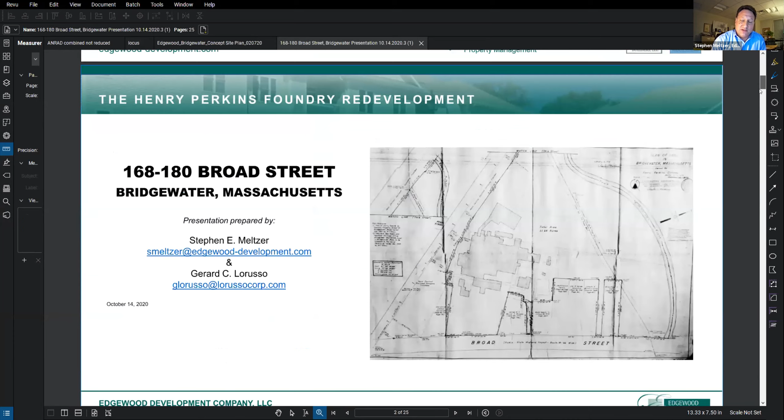Our project basically consists of removal of the buildings that are there now, grading the property, and constructing a building in the front which will be a mixed-use building with retail on the first floor and residential apartments on the second floor. That's a small building in the front, and then with any luck, the project will include a larger building with residential apartments in the back, green space, and recreational amenities for members of the community to use.

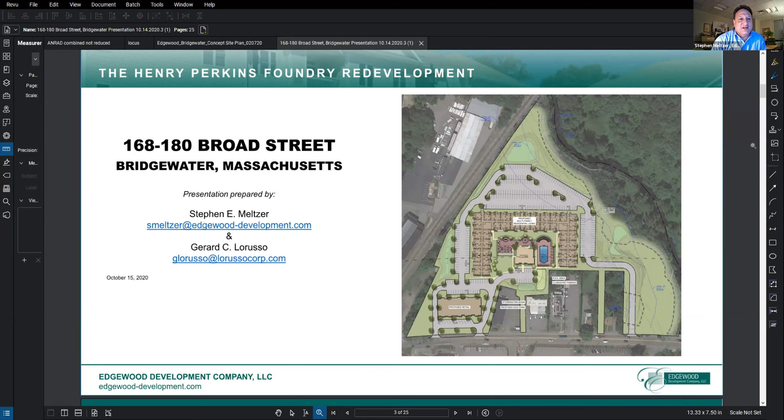Oh, great. Thank you for bringing that up, Seaver. So you can see on the plan, as much as possible, we're avoiding the jurisdictional areas.

Seaver Anderson is with us tonight from PAR Corporation. He is our environmental and wetlands engineer who will be providing the information on the ANRAD. But we also have with us tonight Peter DeShaves, who we've engaged as an environmental engineer. He's done a significant amount of soils testing on the site, so in case you have any questions or concerns with regard to the soils. And Christine LeBlanc is also here, who is the licensed site professional who has been working with the Perkins Foundry for a couple of decades on the environmental challenges out on that site. I'm happy to answer any questions about the project.

Did we lose him? I think he froze. Yeah, I think we lost him. Seaver, if you'd like to pick up for him, and we'll see if Mr. Meltzer makes it back in.

This is, certainly, looks like he's back. As I said, there are some soils issues that we're working with DEP on, and Peter Shaves can give you information on that. But I'm going to hand it off to Seaver Anderson, who's going to talk about the wetlands issues and give an overview of that and get us started. Unless anybody has any questions now.

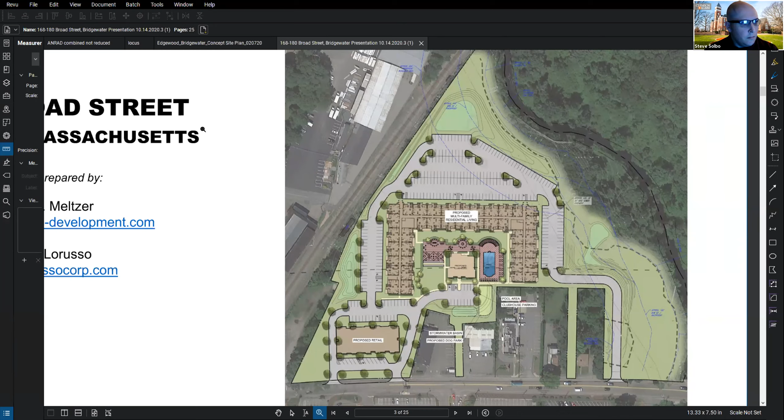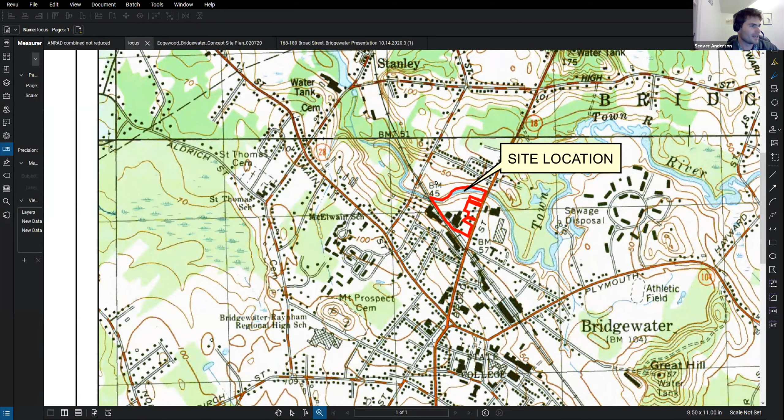Thank you, Stephen. Thank you, Steve, and thanks to the commission for hearing us tonight. As mentioned, the site is located at 168-180 Broad Street in Bridgewater. Here's a locus map showing its location. There's Broad Street, the MBTA commuter rail goes along the southwestern edge of the property. Broad Street follows or delineates the eastern edge of the property, and then the town river defines the northern boundary.

I'm just going to bring up the ANRAD plan. Site wetlands consist of the town river to the north. The southern bank of the river was delineated by PAR, and this is defined by the R series flags that begin on the northwestern edge of the property and delineate the river for the length of it to Broad Street.

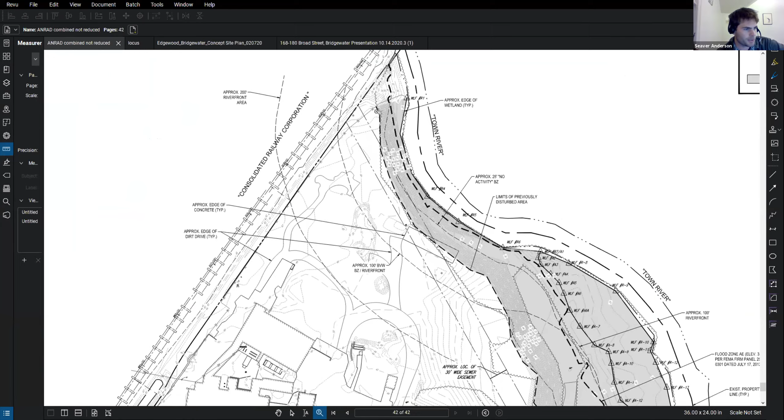There is also a bordering vegetated wetland located along the town river. It's a floodplain wetland, and its edge is well defined by a dirt road that runs along here, and it's a pretty defined break in slope that delineates that wetland edge. I should also mention that the banks of the town river are very steep. You can tell by these contour lines here, it's a very steep slope that goes pretty much right from upland down to the banks of the river. So there's no real gradual wetland edges on the property.

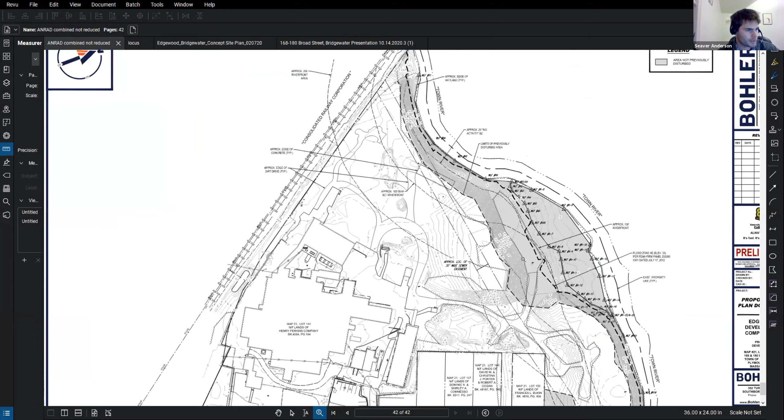There's a 25-foot no activity zone, as you all know, and then a 200-foot riverfront area and a 100-foot buffer zone off of these features. Also delineated on the site is the extent of previously developed riverfront area, which extends to the break in this steep slope that's present along pretty much the entire site, except for one area where a dirt road comes through here.

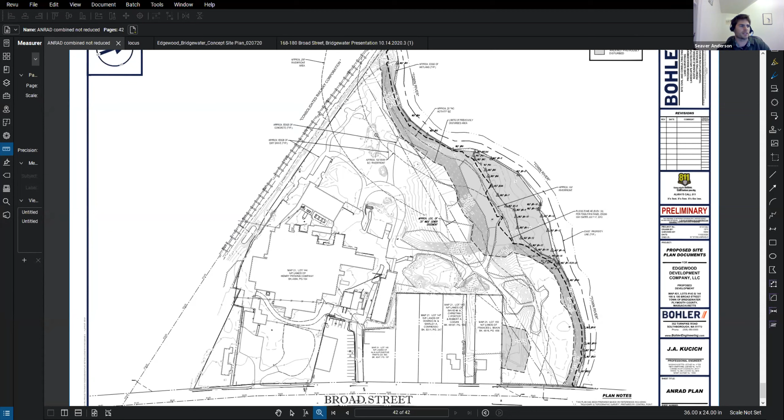This portion of the riverfront area consists of previously developed land, as defined in the WPA, consisting of abandoned dumping grounds. It exhibits a lack of topsoil, and this is evidenced throughout the site, with old foundry materials, asphalt, slag, and concrete debris. You don't have to dig very far for it to be noticeable.

So in this resource, we request approval of these delineated lines and the mapping of the previously developed riverfront area, as it will be critical to the design of the project going forward. Thank you, that was all for tonight.

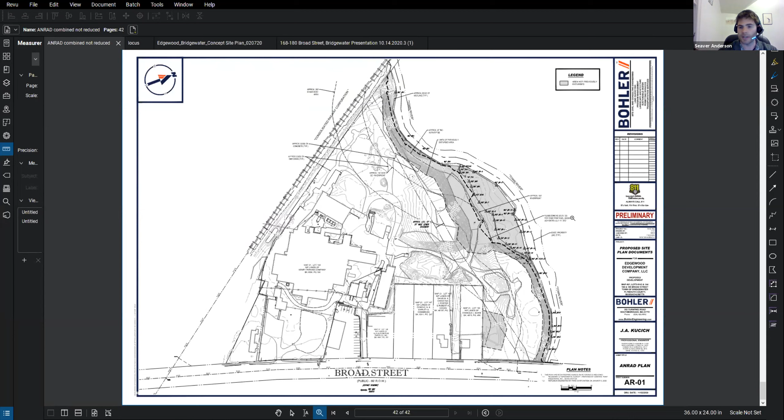If you need any questions on the soils further, Peter has done borings and test pits and can go into more detail on the site soils in this area. Thank you, yes, I would like some detail on the soil testing you did. What type of soils did you find?

Thank you for having us attend your meeting tonight. As Seaver indicated, along the steep slope from the top of the bank down to the river, the materials there generally consisted of foundry sand, a very coarse foundry sand previously used in foundry molds. Some had smaller pieces of concrete, but for the most part it was foundry sand, also known as green sand, although it was not colored green.

And it has just been stockpiled there historically after it served its purpose in the foundry molds.

Can you go into more detail with the soil testing, what type of soils you found, like an RCS 1, 2, any COM, any type of testing that way?

We tested several samples for a range of compounds, including extractable petroleum hydrocarbon fractions and target analytes, volatile petroleum hydrocarbon fractions and target analytes, PCBs, metals, and volatile organic compounds. With the exception of metals, we did not detect any of the other compounds in the sand at concentrations above the laboratory limits or above RCS1 standards.

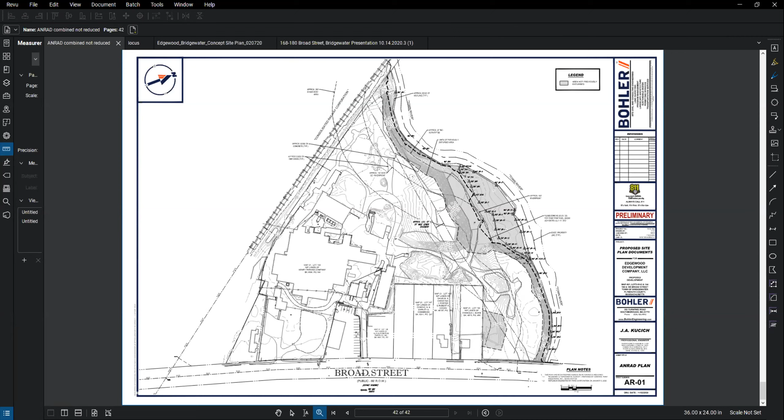Marilyn McDonald, aye. Harry Bailey, aye. Eileen Prisco, aye. Thank you guys very much for your presentation. Have a good evening. Thank you, everyone. Thank you, have a good night. See you next year.

That's the first one so far. Yeah. All right, moving right along.

Jasmine, if you can read in, please, the notice of intent for High Street Dam, Milone and MacBroom. Yeah, you can hear me okay? Yep, can hear you. In accordance with the Massachusetts General Laws, Chapter 131, Section 40, and the Town of Bridgewater Local Wetland Bylaw, the Bridgewater Conservation Commission will hold a public hearing held as a virtual meeting over Zoom.

On December 10th, 2020. A link and instructions to participate in the meeting will follow to be posted to the town's calendar on the town's website at www.bridgewaterma.org. A recording of the meeting will also be posted to the town's webpage within 48 hours after the meeting ends. The hearing is on a notice of intent filed by Bridgewater MA. The applicant proposes to remove the High Street Dam, replace the High Street Bridge, and restore the town river channel. The property is owned by the town of Bridgewater and MEM Realty Trust and is located at High Street in Bridgewater, Mass. Map 10, parcel 40 and 41.

Please contact the Bridgewater Conservation Office at 508-697-0950 for the hearing date and time. All interested persons are encouraged to attend. Thank you, Jasmine. High Street Dam project, you are now open.

Thank you. Oh, Michael, sorry, wanted to say something as well. Nope. Thank you for entertaining the request, and I'll turn it over to Chris Houle from Massachusetts DER to sort of guide the presentation. Thank you very much, Chair, as well as the rest of the commission members and Mr. Solbo.

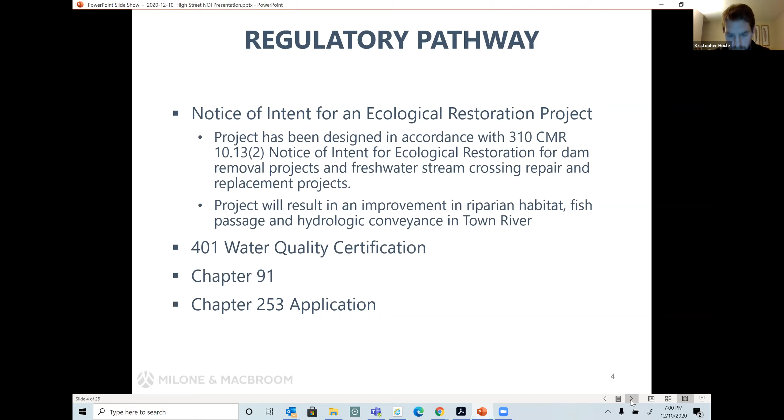Just to touch quickly on project timeline. Planning for this project began in about 2015. In 2016, it was accepted by the Commonwealth as a priority project.

At that time, we also held the first of three public meetings. Shortly thereafter, in 2017, Milone and MacBroom completed a feasibility study. We then shared the results of that at another public meeting, and tried to address public concerns as part of the preliminary design process and Section 106 historical consultation process.

On the historical aspects, the NOAA Restoration Center is the lead federal agency for this project, and they're leading all Section 106 related or historical related questions. So if anything comes up on that, we'll have some folks on the call to take those questions.

2020 is when we really started permitting. We hope to complete final design and permitting next calendar year to set us up for bidding and construction during the summer period of 2022. That's based on various fisheries time of year restrictions and trying to minimize disruption of traffic.

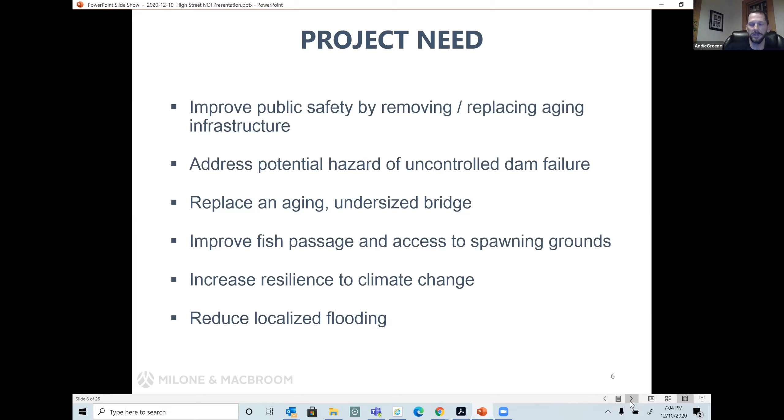So project goals and objectives: by replacing the bridge and improving the intersection, we provide improved multimodal transportation, replacement of utilities within the corridor, and will stabilize infrastructure and the structure itself of the Lincoln Athletic Building.

We are going to manage the impounded sediments within the stream channel upstream of the dam in a controlled manner. And I say this on every dam removal project that I work on: we want to improve access and bring people to the river. Sometimes they're walled off and not easily accessible for the public.

And probably one of the most important goals and objectives is that by removing the dam, we'll restore the natural river processes, the natural movement of flow of water, sediment, and nutrients in the river the way it would have been before man intervened.

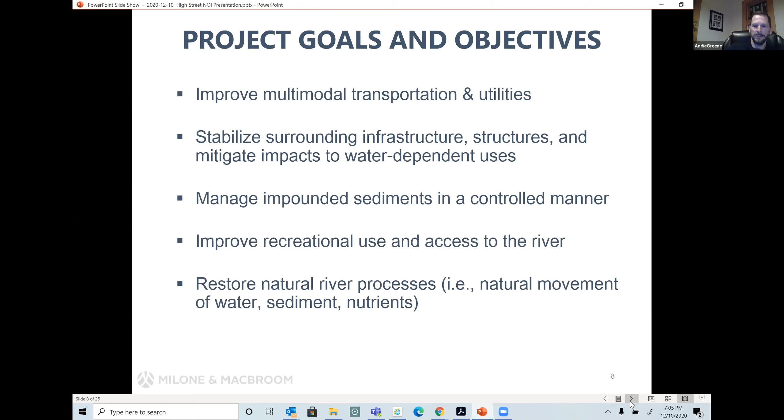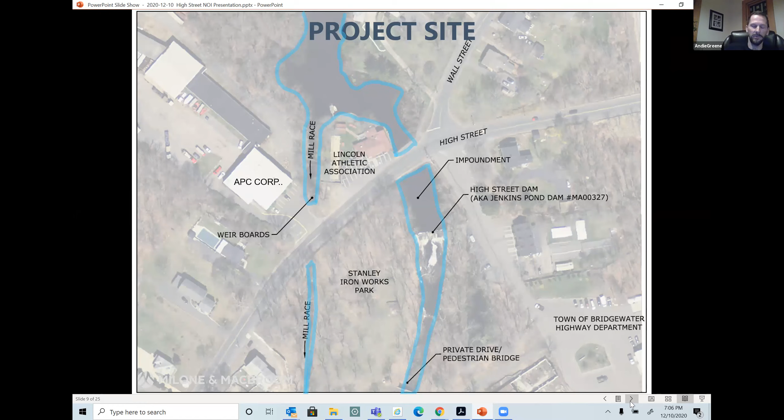That's a piece of land surrounded by the river. Town River flows from the top of the page to the south under High Street. You can see the dam is that whitewater area kind of in the middle, shows up nicely. At this site, there's a mill race that flows around Lincoln Athletic to the west of Stanley Iron Works Park. The town of Bridgewater Highway Department is also in the lower right-hand corner of this aerial photo.

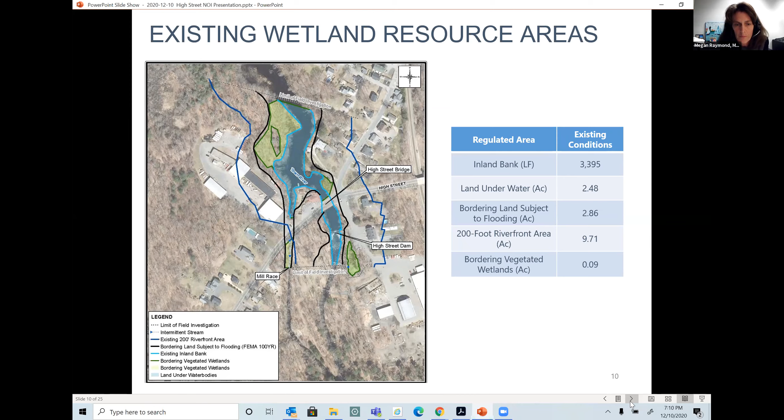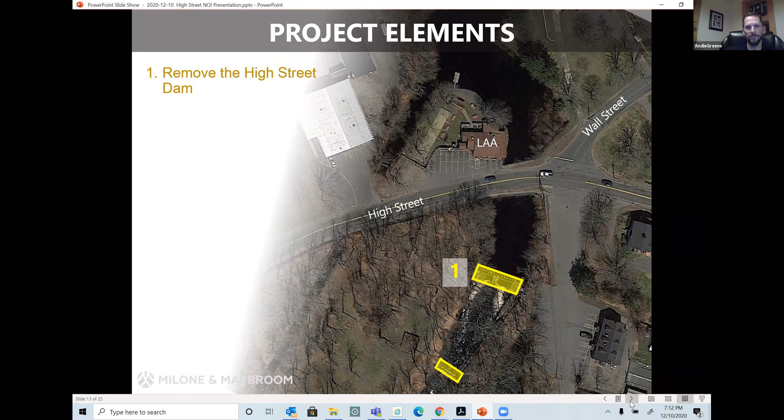So the project elements associated with the site - this is an aerial of that same area with the Lincoln Athletic Building labeled there in the middle. What we're proposing is highlighted in yellow: the dam itself and removing the dam. The yellow box at the downstream section is a very short, about 1 foot high concrete weir used to direct fish into the fish ladder that's there - that will also be removed. The purple is High Street Bridge, which will be removed and replaced.

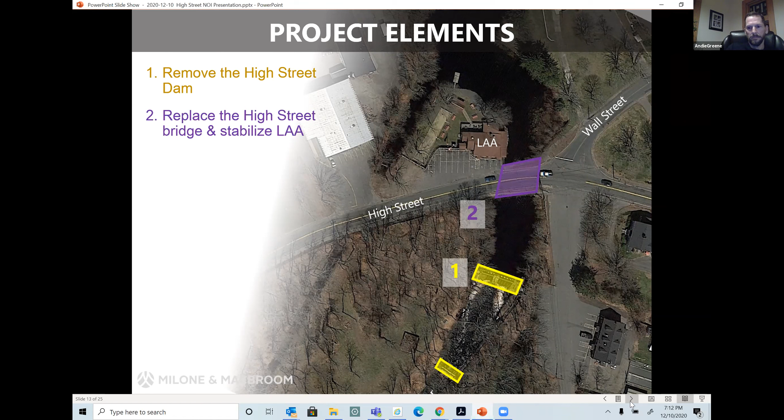Oops, sorry, I went too fast there.

The blue is the reconstruction of Town River in a naturalized fashion. We'll remove the accumulated sediment, about 2 feet in the lower section and about 1 foot in the upper section. We use natural channel methods when designing our stream restoration projects in order to mimic nature as closely as we can, with features standard or typical to what's normally found in nature, including some rock, root wads, and bank stabilization measures.

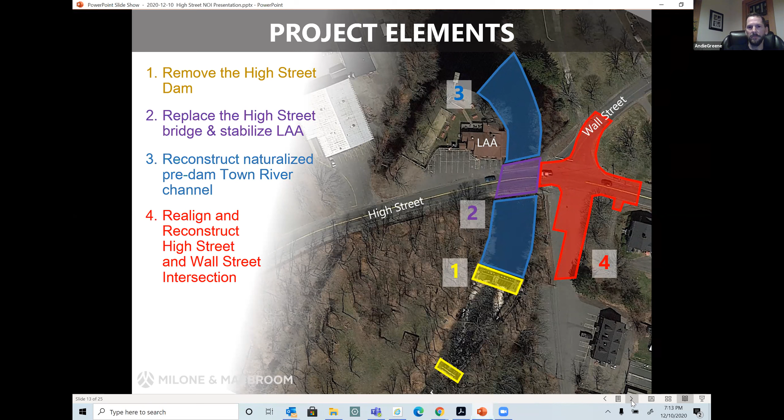Associated with the bridge replacement, the red represents the realignment of Wall Street into a more traditional teed-up fashion, which is a safer orientation for that intersection than the current Y intersection. There's also some improvements to the driveway and access to the DPW facility.

Last on this slide are some stormwater quality improvements. The green box on the left is an offline stormwater treatment chamber that will treat all the stormwater in High Street to the west up the hill, as far as that drainage system starts at the intersection with Main Street. There's also a green box adjacent to the red pavement improvements, which is a bioretention swale used to treat stormwater flowing from the driveway and the new parking in that area.

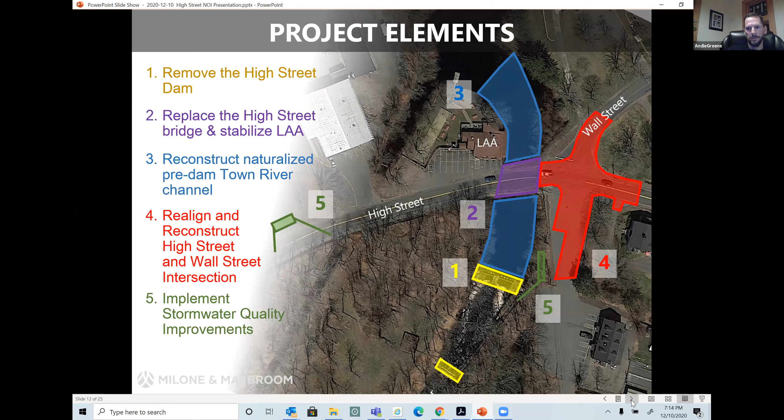This is a similar drawing, our nuts-and-bolts construction access plan. We've taken considerable measures, based on input from several partners, to ensure our access through the Stanley Ironworks Park avoids areas with existing foundations and remnants of buildings. We've placed access to minimize or eliminate any potential disturbance. We also have construction access from the driveway to the Department of Public Works, and we need to get into the river upstream of the High Street roadway as well.

Just to talk about the construction staging plan: we have construction entrances with anti-tracking pads at all of our access points to minimize tracking of sediment or silt onto the roadways.

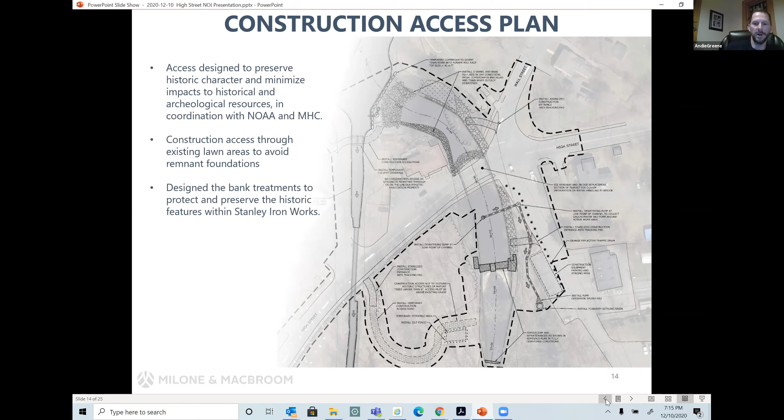Going back to that slide to talk about water control - in order to remove the dam and replace the bridge, we're fortunate at this site. What we plan to do is utilize the mill race on the left-hand side, coffer dam off the river just upstream of the Lincoln Athletic Building, and shunt all the flow into the mill race, drying up the section of river where the dam and bridge are, so that work can be completed in the dry with no river flow through there.

In our stockpile and staging areas, those will be protected with standard siltation barriers and hay bales or straw bales in order to minimize any migration of silt off the site.

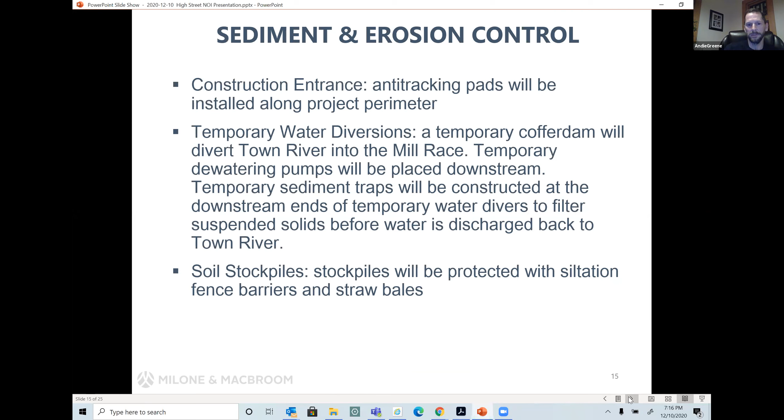For the stormwater improvements, I touched on these a little bit, but it's important to note that we're actually reducing impervious pavement by 2,800 square feet with the way we reconfigure the interchange of High Street and Wall Street and the new driveway to the DPW facility. As part of constructing the new bridge, the intersection and that section of roadway will all have new catch basins.

These catch basins will have the current standard 4-foot deep sumps, and the outfalls will go through the new bridge wing walls. There's also the bioretention swale for storm drainage along the new driveway and parking to DPW, and the offline stormwater treatment chamber for the High Street drainage system. With the proposed design, there will be no increase in peak rates of stormwater discharge, which is always a goal.

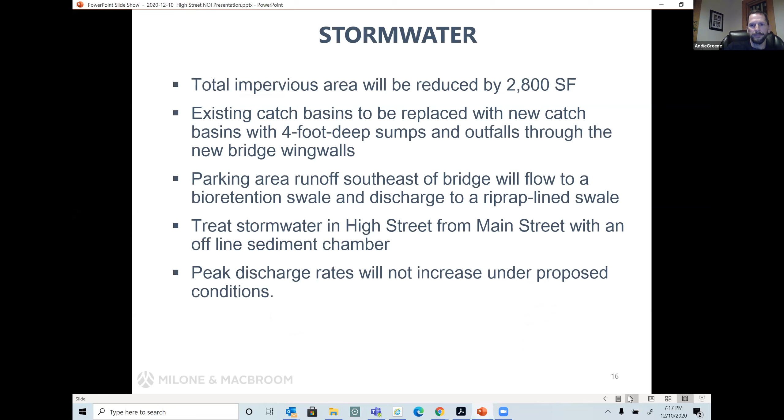Megan Raymond again. We're here this evening as this project relates to the delineated and protected wetland resources in the project vicinity. Consistent with the notice of intent for ecological restoration, it's important to note there's no net loss of any wetland resources through this project. We'll see a slight modification in the allotment of these resources with the removal of the dam and restoration of river flow.

We're going to see a decrease in land underwater in favor of more bordering vegetated wetland. This is a typical occurrence when we remove a flow impediment. We've tabulated these modifications in the reporting, making sure that all performance standards for each protected wetland resource area—bank, land underwater, bordering land subject to flooding, and riverfront area—are adhered to and consistent with regulations.

It's an interesting configuration with the dam and the river. As we move along this river system, the dam didn't intrinsically modify a lot of the morphological properties we expect to see in a river system. Looking upstream, we see nice meander bends with bordering and emergent vegetation on both sides. So as the dam is removed, we'll see a decrease in water level and a bit more vegetated area along the water line.

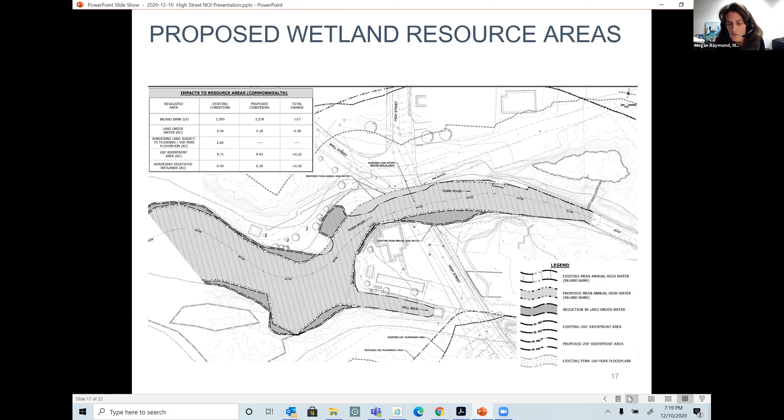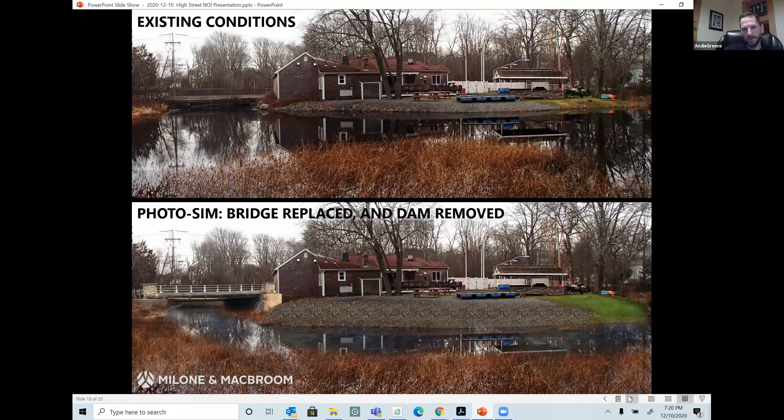And I think that's the last one, so I'll turn it back over. Thank you very much, that was a very thorough presentation. I know the commission's very familiar with the area, so at this time I'll start with Steve for your input.

Thank you, Marilyn, thank you everyone. I've seen the presentation before, and it was geared a little more towards conservation this time, which I think is appropriate. I was brought onto this project when I first started with the town of Bridgewater back last October, so I'm familiar with the workings of the project up to this point.

I think we lost Steve. Yep, you can't hear me? No. Still no. No.

It's Steve, while you're having technical difficulties I'll go on with the commission. At this time I do not have any questions. Going through the notice of intent, again, thank you very much for a thorough presentation. So Harry, at this time, any questions?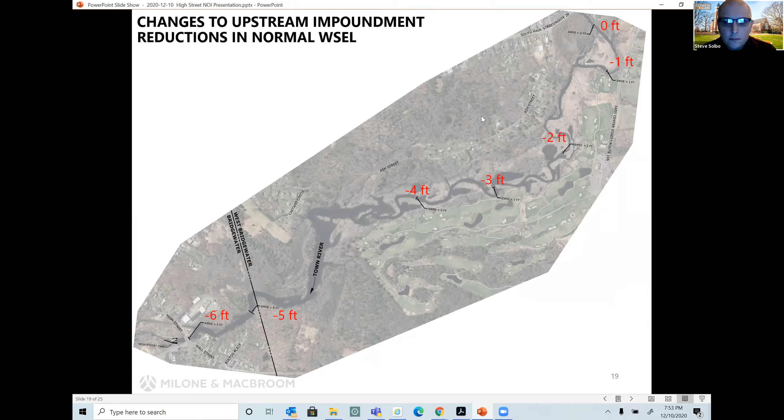So weird that that mic does that. I know, are you using the laptop? No, I've got the dual monitor setup and a webcam on top of one of the screens, but I don't know, it was doing it during class too. Off and on, it's weird, just out of nowhere. I think it's happened maybe once or twice before during meetings, but it generally adjusts itself pretty quickly. Yeah, I haven't had that issue, but I use my headphones. Yeah, I've gotta probably do that too. This setup has Bluetooth capability, and I've got a couple sets of Bluetooth with mics.

What'd you think of the presentation? I thought they did a great job, that team. Oh, absolutely, that was fantastic. It was so thorough. Excited to show the commissioners the site, even though they're all familiar with it. It will be good though. It's a complex project, that's for sure. Yeah, it's kind of exciting though. Yeah.